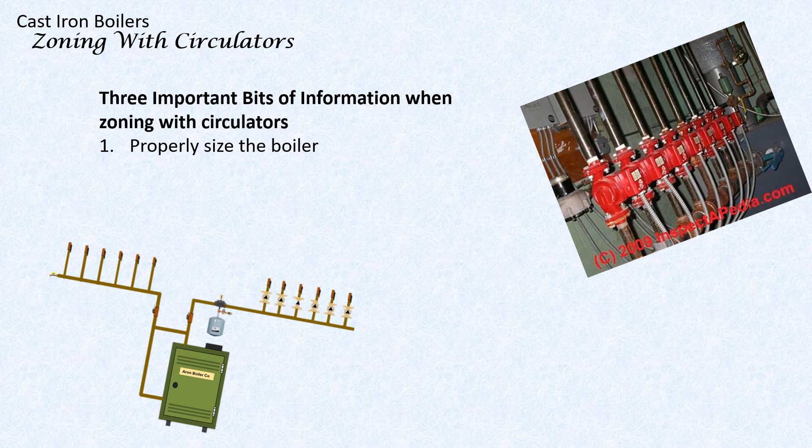Some people do it with oil and degree days, but how much oil is still in the tank? How much is in the tank when it started? And even with a Manual J heat loss, which is what we do, there's some flaws there because it's about 20% heavy because it calculates wind blowing against all four walls at the same time. There's nowhere in the United States I think that happens.

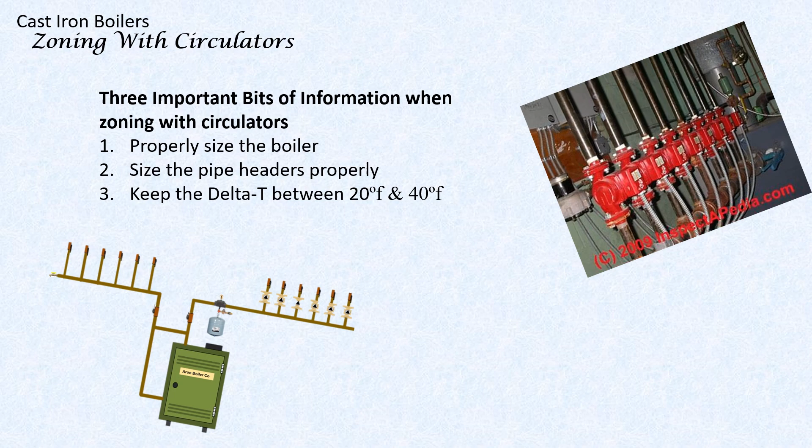I'm going to talk here about an existing cast iron boiler and just figuring out what our flow rates need to be. Hopefully we have a flow restrictor of some type on the piping so we can get it where it needs to have the proper flow rate for that zone. The delta T we can measure. We can measure delta T and figure that out pretty easy. The gallons per minute is what we need to know going through the boiler, what the minimum and maximum is. We have to have that information.

The BTU, that's the input of the boiler. We could also calculate the BTU output of radiation if you want, but right now we're concerned with the boiler. And then the flow rate affects your sizing of your circulators. So not one circulator is a one size fits all. You say, well, I got auto adapt. Yeah, well, it's not magic. You still have to set it up. So let's walk through this and determine our flow rates and what's happening with the boiler.

Let's just assume each zone is 3 gallons a minute. We're just going to keep it simple. Very seldom would they all be the same, but there's 6 zones on this boiler. The boiler is 100,000 BTU input. So if one zone's running, we're going to have 3 gallons a minute flowing through that loop and then through the boiler. You'll be getting the 3 gallons a minute.

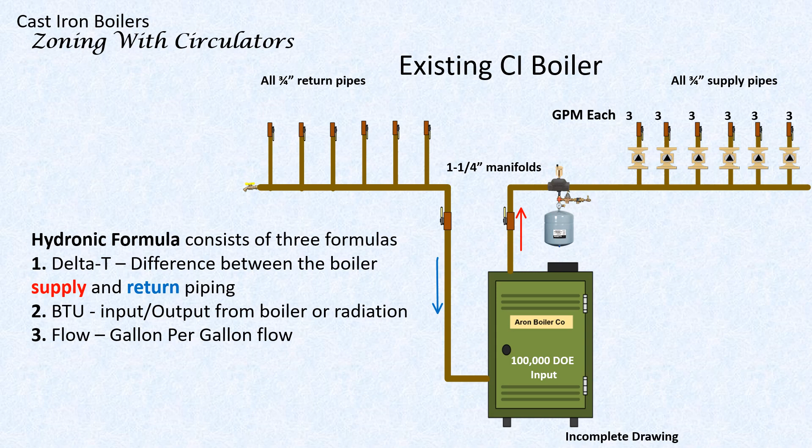I was a contractor for 20 years. Then I worked for the manufacturer for 25 years. And when I was going to seminars as a contractor, the last thing I wanted to do was sit in a seminar where they had formulas. Well, today we're doing formulas. So we did learn the hydronic formula a long time ago, and that formula has helped through the years on resolving some problem jobs.

It's amazing how many times somebody says, I got an area that doesn't heat right. And you say, well, okay, what's the flow in that area? I don't know. What's a delta T? I don't know. Well, you need those bits of information to figure out if we're moving enough water, or we need hotter water maybe. Sometimes somebody says, just turn the temperature up. Well, maybe it's not the temperature. Maybe it's a flow issue.

The more water you flow through a zone, the more heat you get out of it. Now, the more water you flow through the zone, it's a possibility you get less temperature though. So you kind of have to know what these facts are before you get too involved in it. So it's easy to figure out. So we're going to look at flow. So we have F equals Q divided by 500 times dT.

So F is flow. That's what we're trying to find out. Q is your BTU input from the boiler, the DOE rating. On gas, it's the middle rating. On oil, it's the first rating. So we can get Q, the input, pretty easy off the tag on the boiler. And the last one is dT, delta T. This is the difference between supply and return piping. Just measure those temperatures and do the math. Just take your supply temperature, deduct the return temperature, and that's your delta T.

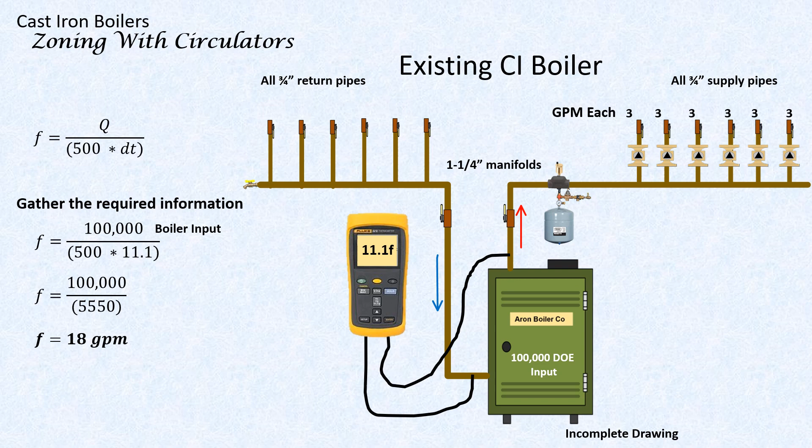And when all these zones are running, when you have to depend on them on the coldest days of the year, that's when most of your zones are going to be running, you are not heating the house quick enough. And your thermostat will never be met. It may not be met in any of the zones. It may meet in some of the zones that are smaller, but it may not. So it would depend on the piping, the size of the circulator, the size of the boiler. But if you have zones that aren't heating, it is normally a delta T or flow issue.

We discussed 20 degree delta T's, how to get 20 degree delta T's. It's pretty simple. You divide the DOE input of the boiler by 10,000. So we have a 100,000 BTU boiler. We divide it by 10,000. That gives us a 10 gallon per minute flow rate. So how do we get a 40 degree delta T? You just divide it by 2. So 100,000 BTU boiler divided by 10,000 is 10 gallons a minute. Half of 10 gallons a minute equals 5 gallons a minute. So that's your 40 degree delta T. You're going to cut your flow rate from a 20 degree in half to get a 40 degree delta T.

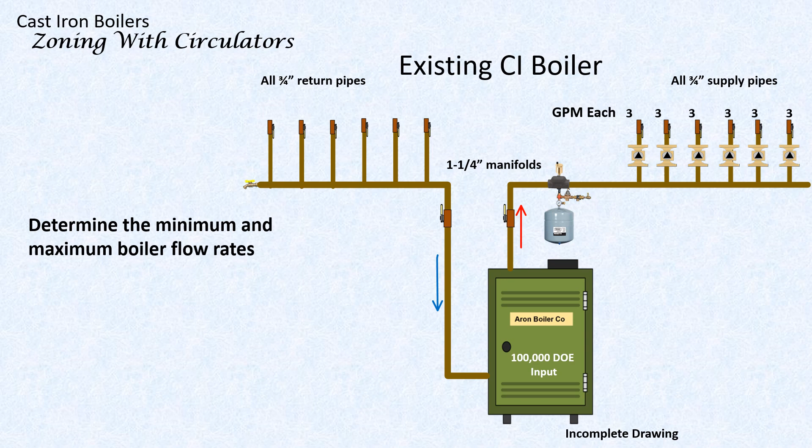We use the same drawing that we used in the last slide. So we have 6 circulators, 3 gallons per zone for each circulator, and therefore we have 18 gallons total flow through the boiler when everything's running. Our pipes are sized properly for our flow rates. That's actually a different seminar that we have on our website, pipe sizing, at comfort-calc.com.

So it's a mild day, 2 circulators are running. We're going to be moving about 6 gallons a minute. The boiler can handle 10 gallons a minute. It's inputting enough fuel to heat the flow rate of 10 gallons a minute. It's going to go out at 20 degrees higher. If we're moving 6 gallons a minute, it's coming in at a certain temperature, and we're going to raise it more than 20 degrees when it goes out. And then let's say it continues to get colder, and now we have 4 thermostats or 4 zones calling. If we take 4 times the 3 gallons per minute, that's 12 gallons a minute.

We're flowing 2 gallons more through that boiler than the maximum flow rate that boiler is rated at a 20 degree delta T. So we're not going to pick up 20 degrees anymore. We're going to pick up something less than 20 degrees. So here's where we start getting into problems.

We're going to still send 100,000 BTUs out, but they're going to be distributed between more gallons. So therefore, we're not going to have as much temperature rise. And it's going to take longer to heat the zones. It's going to condense more, bad for the boiler. So we're not going to short cycle like we would with 6 gallons a minute.

Now we've doubled the flow, and what happens now is it's going through faster. More water is going through that boiler, less time in the boiler. So this creates problems with the short cycling, creates lower efficiencies, higher maintenance. It's harder on the equipment.

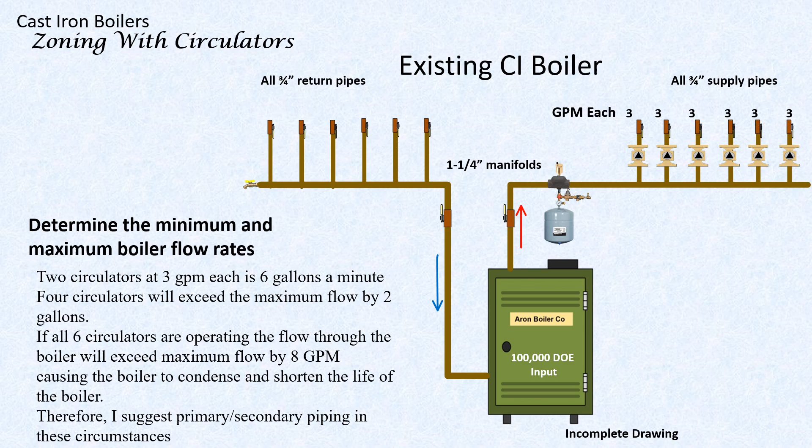Here's how we can fix this. If there's a cast iron boiler and you have these flow rate issues where you have too much water flowing through the boiler, we can do primary secondary piping, and we can add a circulator to the boiler. Now we'd add that circulator to the boiler, it's going to flow water just through the boiler.

It's going to pull it down from the system piping, it's going to put it back up to the system piping, and then the system circulators are still going to flow all the water they need to flow depending on how many circulators are running. When we get these T's in the system, we want to get them as close as we can. I know they look a little far apart here, but if you can get those T's just about touching, you'll create better hydraulic separation.

Now when we get these two different flow rates, we get all these pumps running up in the system and we got that boiler pump running. It doesn't matter if one's higher and one's lower than the other, because with hydraulic separation, closely spaced T's, we will not affect the flow of one circulator to the flow of other circulators. So the boiler can run at its flow rate, the system can run at its flow rate, and they will not affect each other's operation.

Therefore, the boiler can run at a different delta T. If we slow the flow of the boiler down to get the water hotter as it goes through the boiler so it stays in the boiler longer, it will not be affected by all the flow rate in the system.